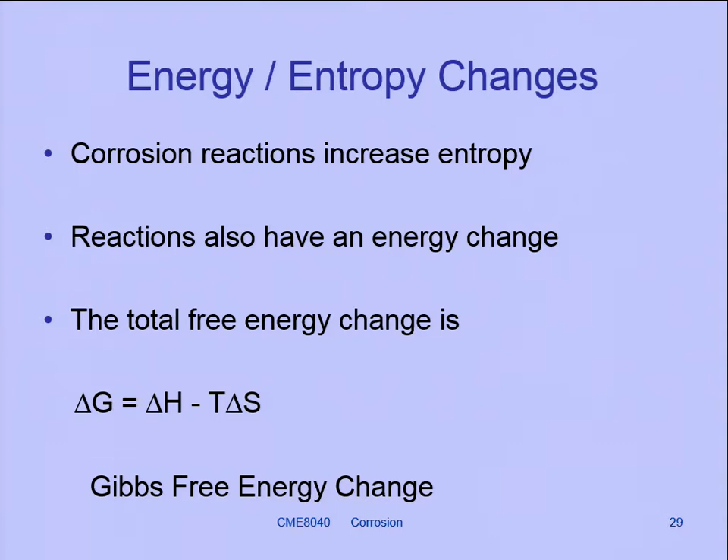I should mention we finished last time saying that all these corrosion processes are reactions, chemical reactions. They have a thermodynamic energy change, and that is related to the electrode potentials that we measure in the field. So the potentials you measure relate to the reactions going on at the anode and cathode. And I think that was our last slide. Yeah, excellent, good, I have to do that because sometimes I get confused. Right, so that's where we were.

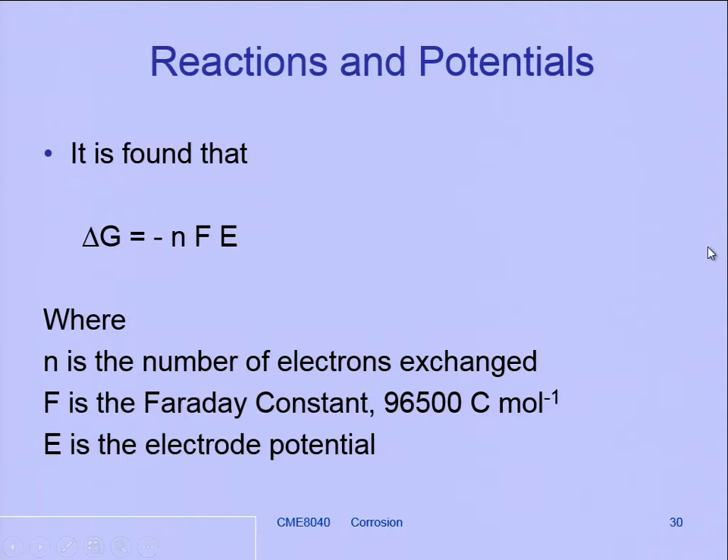What I want to do today is talk a little bit more about electrode potentials. Let's just see whether these are... okay, these are slightly in a different order. So, in order to measure potentials, we need a standard, and the standard that is used internationally is the hydrogen electrode.

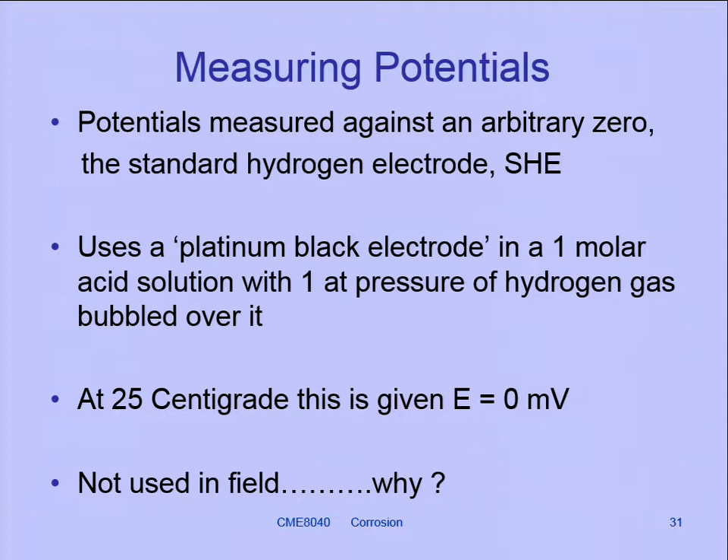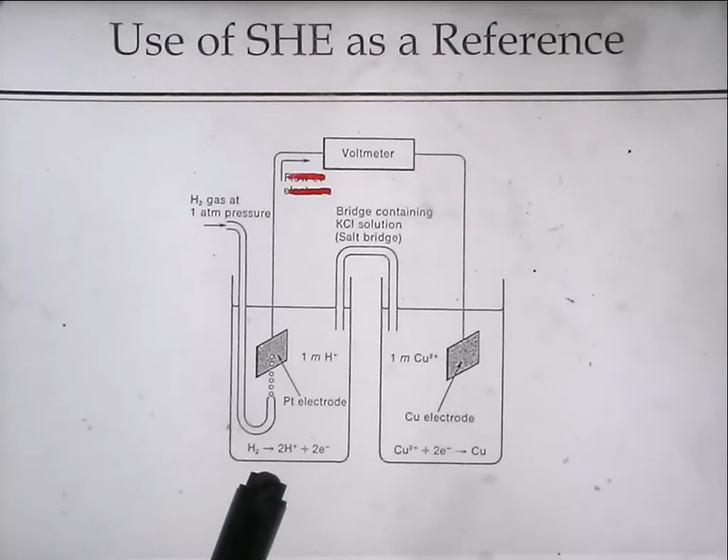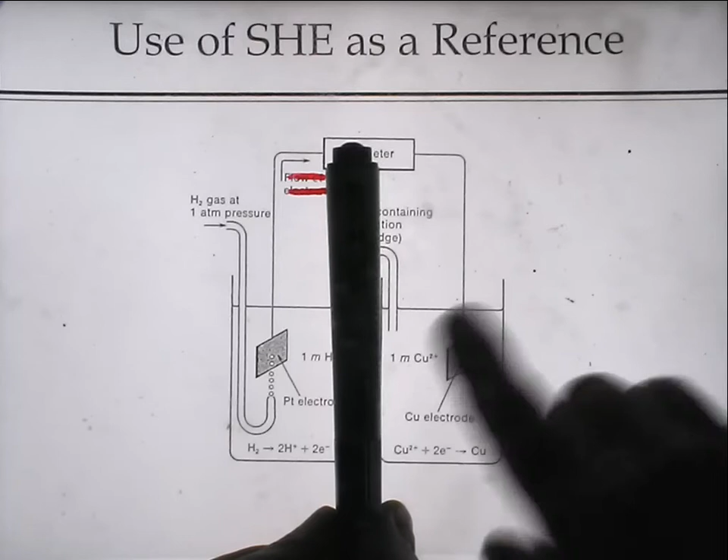What you've got on your handout is a sketch like this, illustrating the hydrogen electrode. The standard electrode is what we call a half cell. So to your left is the standard hydrogen electrode as half of the cell. The other half is the copper electrode, and the combination of the two together makes the whole cell. So quite often you'll see in the text them talking about the half cell reaction.

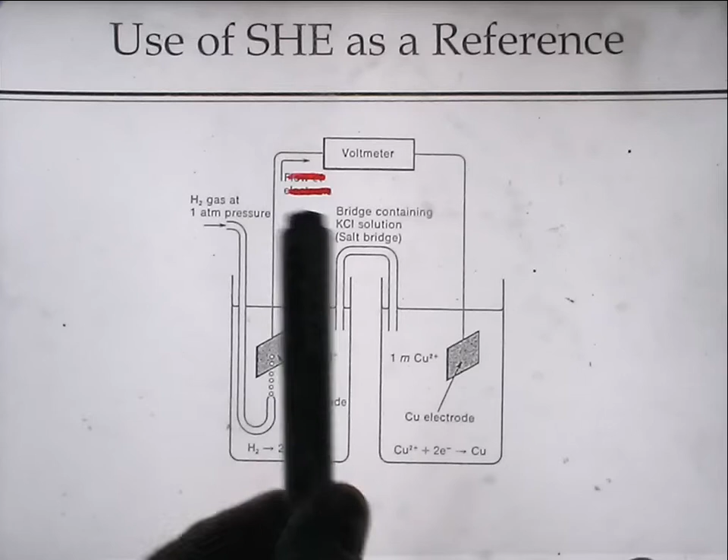Like all textbook drawings, there's an error in here: they are showing, or suggesting, a flow of electrons round the circuit. The whole point of the voltmeter is that it has a high impedance, and there shouldn't be any significant electron flow. There will be a few nanoamps of current flowing, but that voltmeter should have an impedance of something like 10 to the 6 ohms anyway, maybe more, and there won't be much current flowing.

That's how you're supposed to measure potentials without a current flowing. In fact, if you draw a current from a reference electrode, any reference electrode, that's really bad news. You can damage the electrode, and it stops having the constant value that you measure everything else against.

Question: what is the practical usage for this? You take your standard electrode, not this one, this is the lab one, and a voltmeter, and you can go and measure the potential of your pipe in the field. So if it shows 0, it's okay.

How can we detect the potential? Measure it on the digital voltmeter. So what should it show? Well, for example, if you were getting good cathodic protection, you'd want about minus 900 millivolts against a copper sulfate electrode. But you're leaping ahead into the application. The application is to measure the potential on your unknown electrode. Is it being cathodically protected? Is it corroding? What is the potential of this piece of steel in groundwater, or in this case in the lab with the copper plate indicator?

We measure it against a standard using a high impedance voltmeter. So, as I say, this is a half cell and that's a half cell, and the combination is the whole cell. Let's check that. Yeah, that's all right.

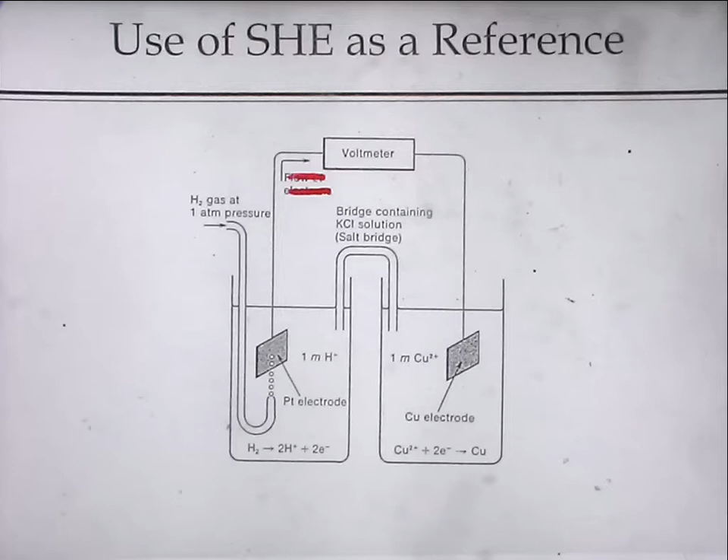What you're measuring, we've been calling it voltage. The laboratory name for it is electromotive force, EMF. And what you find in the literature are tables of EMF values. What you've got in your handout is a small sample of one of those EMF tables.

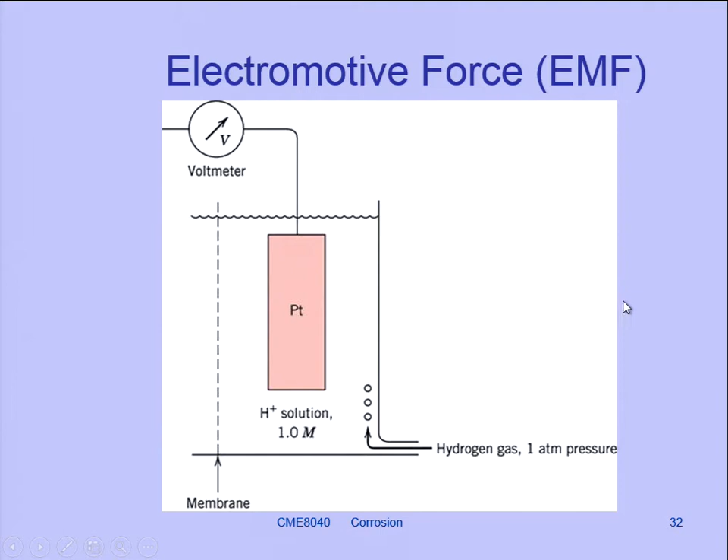Okay, see what the next one is. Oops, might have done that. Don't do that. Yes, okay.

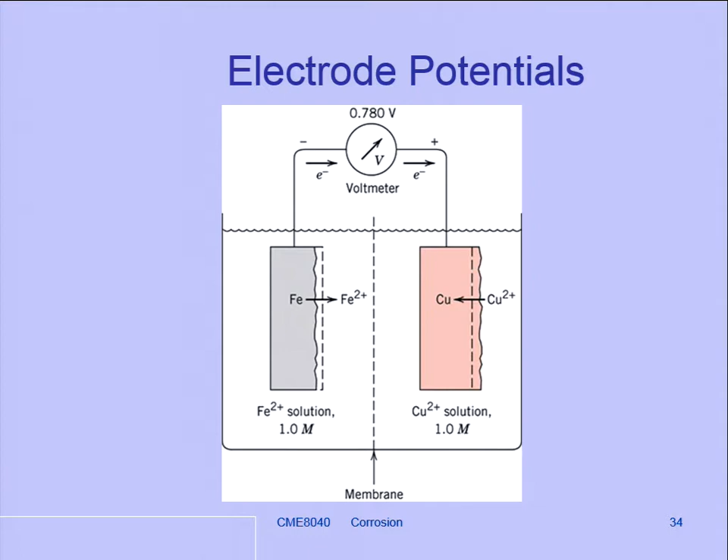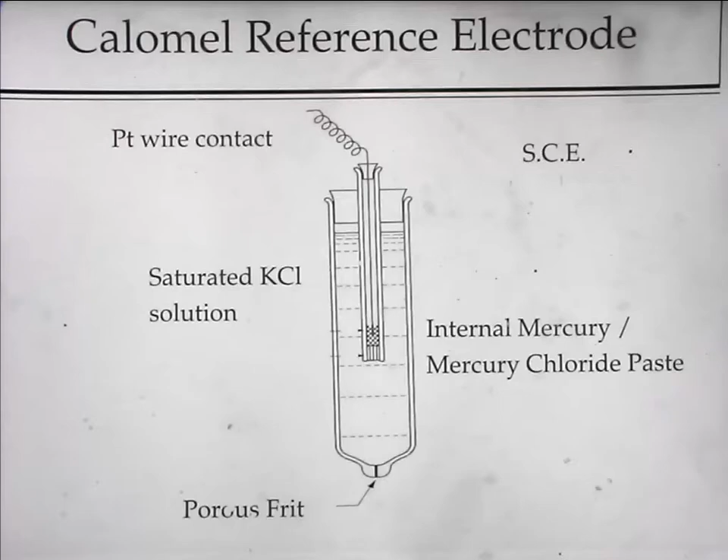This is just a cross-section of one of the more commonly used electrodes. It's still not the most common, and I'll give you a section of another one in a minute. But this is what they call the calomel electrode. It's actually a mercury chloride electrode, but the electrodes all have some basic features in common. They're quite often a plastic tube now, and at the bottom is a porous frit, a link between the solution within the chamber and the environment, the groundwater or whatever your electrolyte is.

And this electrode has a known voltage against the international standard, so I can tell you it's 241 millivolts against the standard hydrogen electrode at room temperature. There are temperature correction tables, but you don't really need to know about that at this stage. The point is, I could measure a voltage in an environment using this sort of electrode and then correct it to SHE.

I can pass that round. I've taken the solution out of it just in case anybody dropped it. The tube now in commercial ones is plastic, but the idea of having a body with a porous frit on the end, with a single lead coming out to go to your digital voltmeter, is the standard format for these things.

Just check. That's all right.

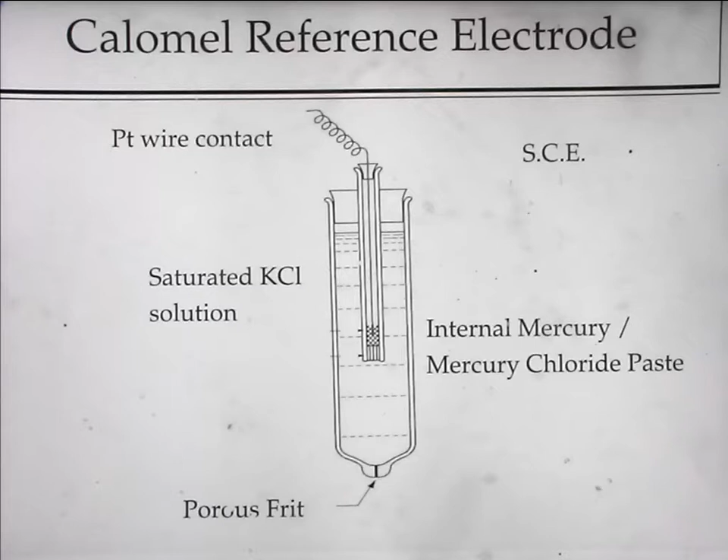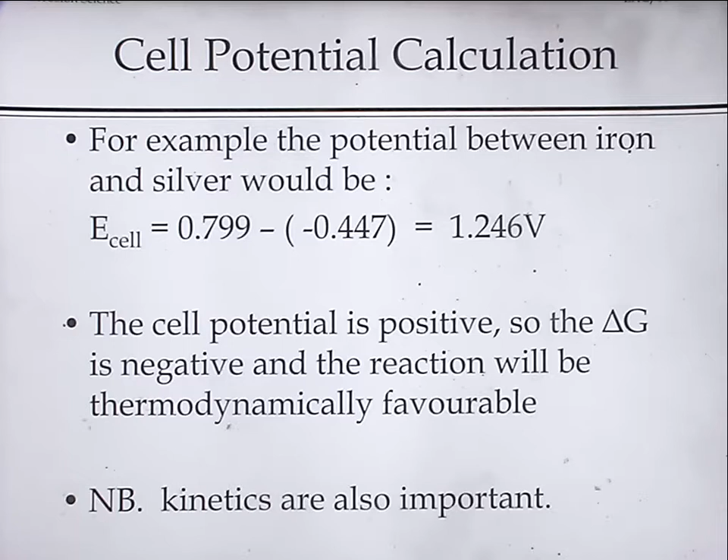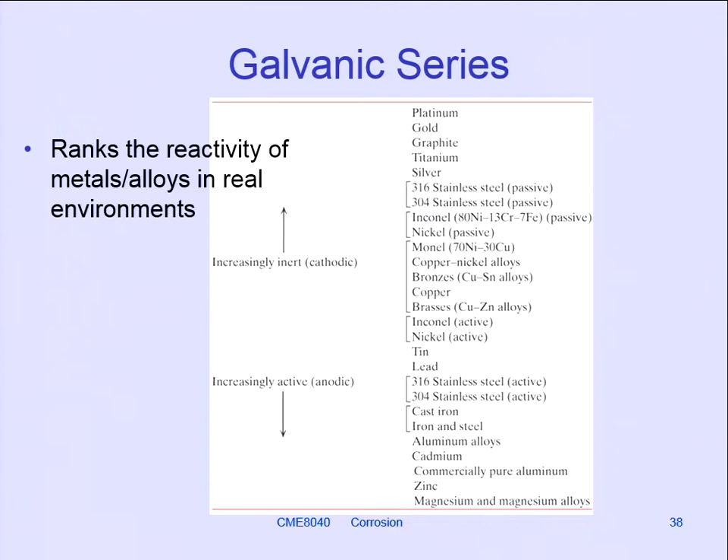Zero value. And then the sort of things that you can do with that - this is a section showing a plot of potential round a pipe. So this pipe is coming horizontally out through the board, and this is the field in the earth around the pipe. That's measured by having one contact on the pipe, one contact on the reference electrode, and using a voltmeter to measure the potential at various fixed distances away from the pipe, and then plotting the graph.

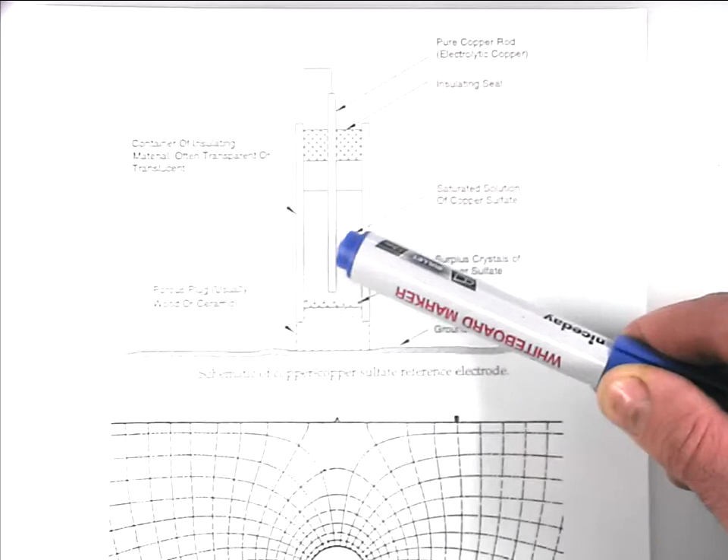So you can get potential field data, and that gets interesting once you start getting pipe lines intersecting each other. So you want to know what the potential gradient is around your pipe, and you want to know whether your pipe field is affecting somebody else's pipe. That's also very common in places like the UK, where we've got pipes intersecting all over the place.

So we can measure the potentials and start using the data. What we've got on the other side of the handout is this little plot, which is just to illustrate the changes in values that you get using different reference electrodes. So this is the copper sulfate electrode. Then we've got the standard hydrogen electrode. And lastly, we've got another standard that's used sometimes, and that's the zinc in seawater electrode.

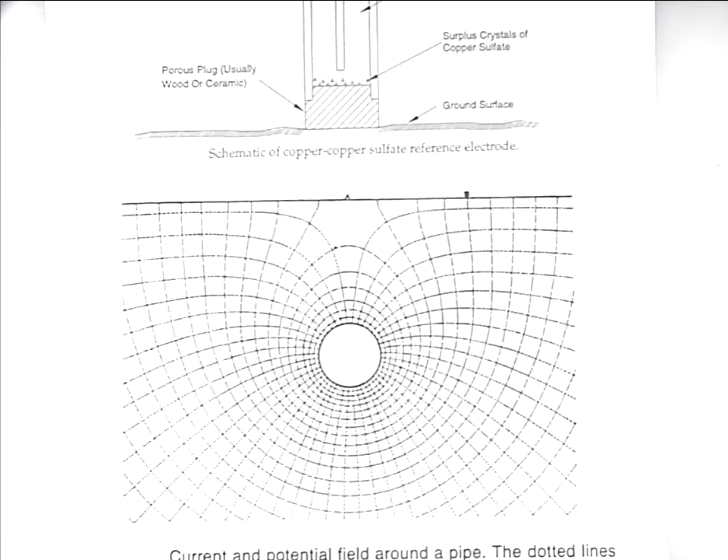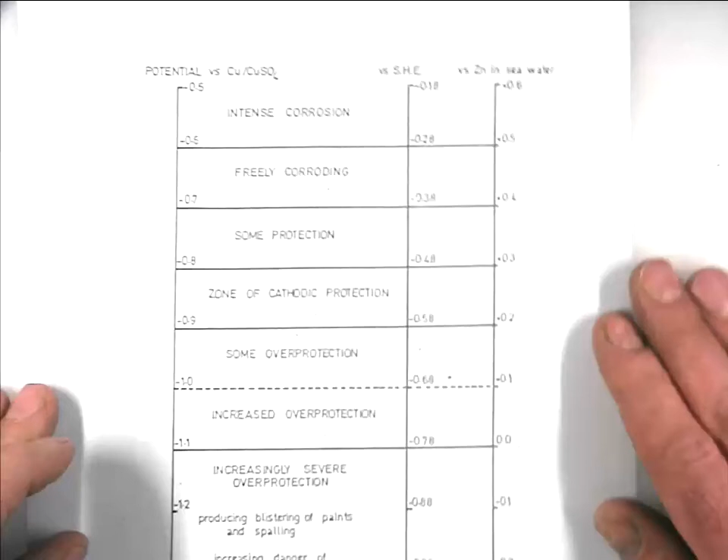The point is, when we get into our zone of cathodic protection, where we're happy that the steel is not going to corrode, that's 0.9 volts against the copper sulfate. It's actually only about 0.6 against the standard hydrogen, and it's only plus 0.2 against the zinc in seawater. So you've got to make sure that you quote the right reference electrode so you know where your values are coming from. Okay.

Is this list always true, or will different books have different zones for the cathodic protection?

This is for pipeline steel in mildly alkaline environments, so it'd be true in seawater, carbonate bicarbonate solutions, groundwaters. They're giving you a zone of about 100 millivolts to allow for that. It's obviously not true for stainless steel or an aluminium alloy, so there are different charts for different materials and different extremes of environment. But this is common data, so if you were asked about a piece of pipeline steel, you'd plump for one of these values and it would be fine.

Unless it somehow got into some weird environment other than groundwater, then if the environment was more aggressive you'd have to put more cathodic protection on. If it was less aggressive, you could save money by turning the cathodic protection down a bit. So it's quite useful data in that sense.

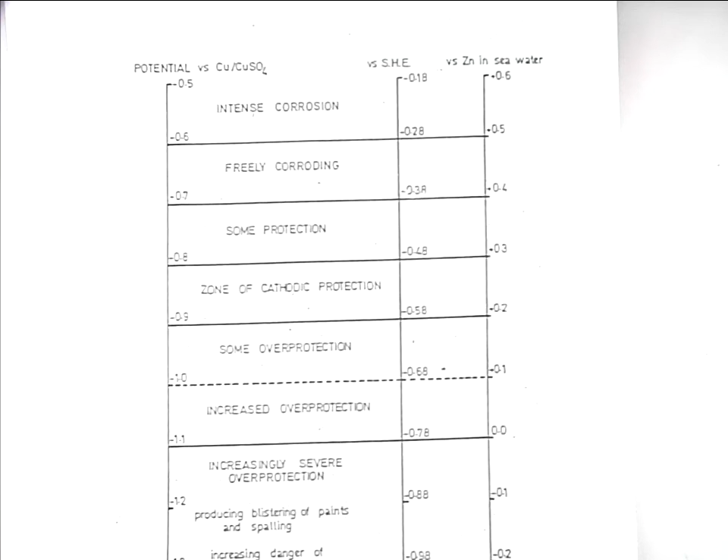That's a pH electrode. It would be used in conjunction with one of those reference electrodes to probe an area for pH, and the active part is this special glass - filament's not quite the right word - but a special glass end to this sleeved probe. That one still has fluid in it, so don't snap it, but they're quite hardy, robust and portable components that allow you to look at pH.

And that's what I want to talk to you about next, a little bit about pH.

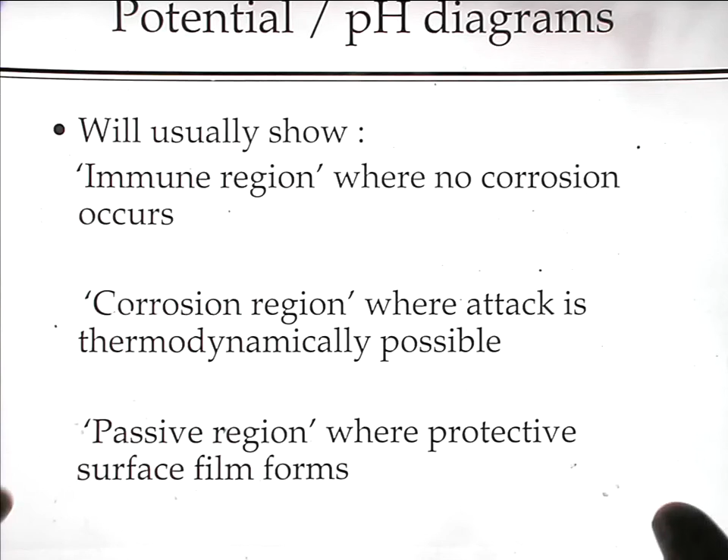So you've got potential against pH on your handout, and what this diagram's showing is as you go to lower potentials, then the iron is the stable form. So this is the immune region where no corrosion is occurring, immunity down here.

At higher potentials, you go more anodic, then you begin to get corrosion, and these shaded regions here, and also at high alkaline pH over here, are the corrosion regions for the steel. And then in this intermediate region here, you've actually grown a film of Fe3O4, which is magnetite, black oxide, and that actually is passivating. So we've got immune, corrosion over here at this end as well, the shaded areas of corrosion, and passivity in this middle region here.

That's common for quite a lot of the diagrams, different shapes for different metals, but you'll find these three regions somewhere on the plot, and in this case actually two corrosion regions, one at low pH and one at high pH.

Okay, we'll talk a little bit more about these next time.

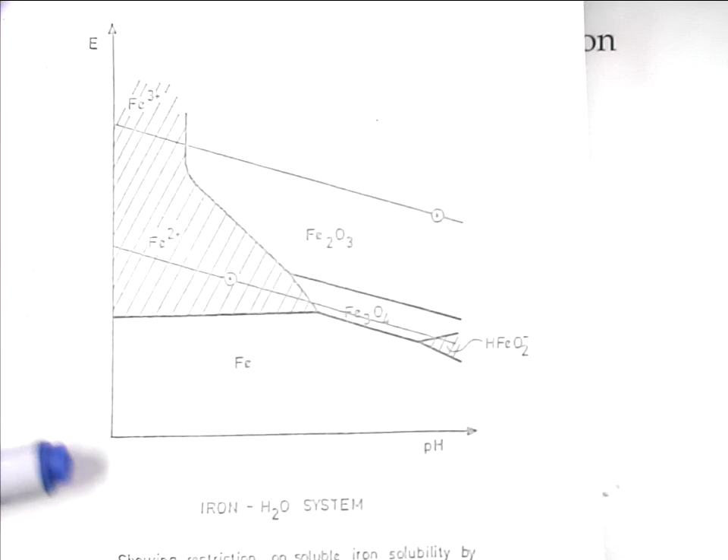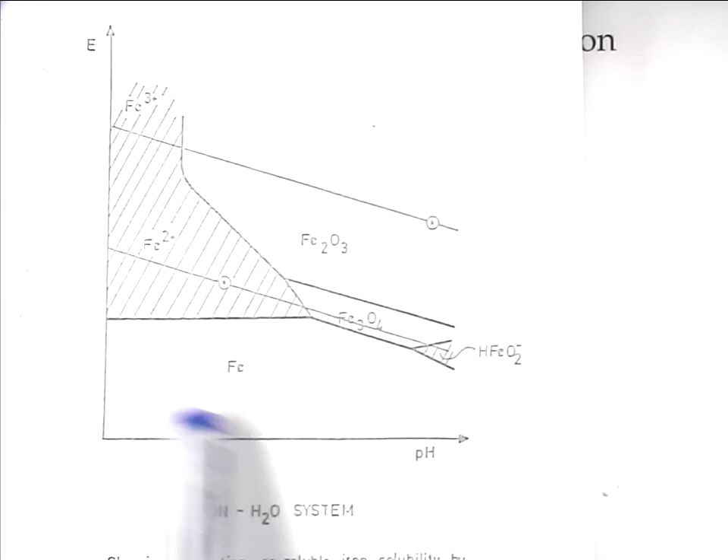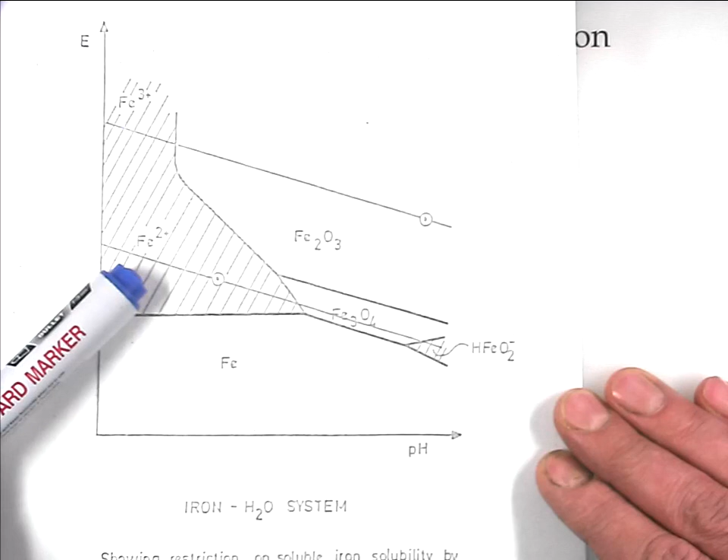The passivity - where this Fe3O4 is, that's a passive layer. So this just starts to corrode, and then it blocks off any further corrosion. Fe2O3 is porous - you can get that at higher potentials, but it's a porous film rather than a passive film. So that's brown rust.

It just carries on corroding.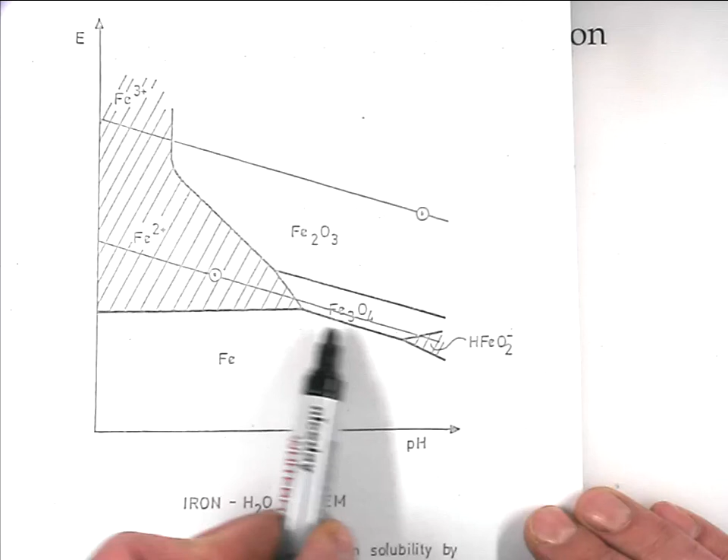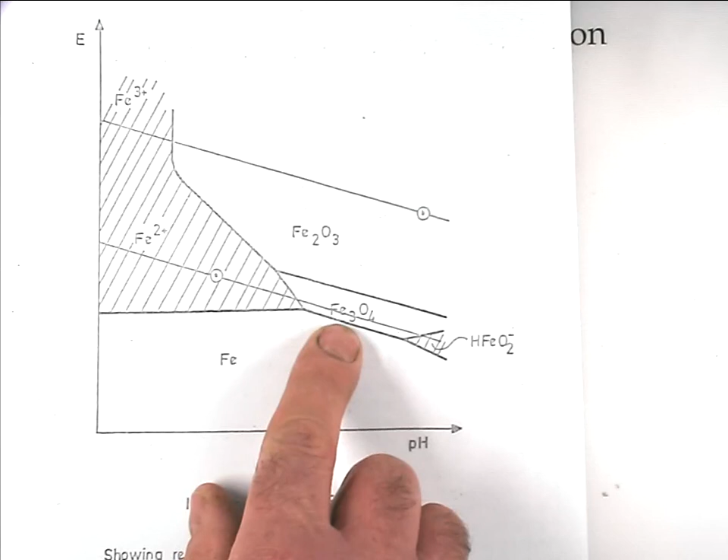So this is passivated, that's fine. Here you get some - you start to get some corrosion because the Fe2O3 is porous, so it won't actually stop. In a sense, as you move more anodically, you're going to get more corrosion generally. So this isn't, I know it's not shaded in, but this isn't passive.

It is tending to corrode as you go. This is showing you what happens if you take a sample and hold it at this potential at this pH. It doesn't show how it will change if you move it.

Fe3O4 is stable, so it will just stay, maybe over a long period of time, but it doesn't tell you anything about the speed of the processes. This is thermodynamic data. It just says if you go there, then a piece of steel will corrode. If you go here, it won't corrode. If you go here, it will passivate.

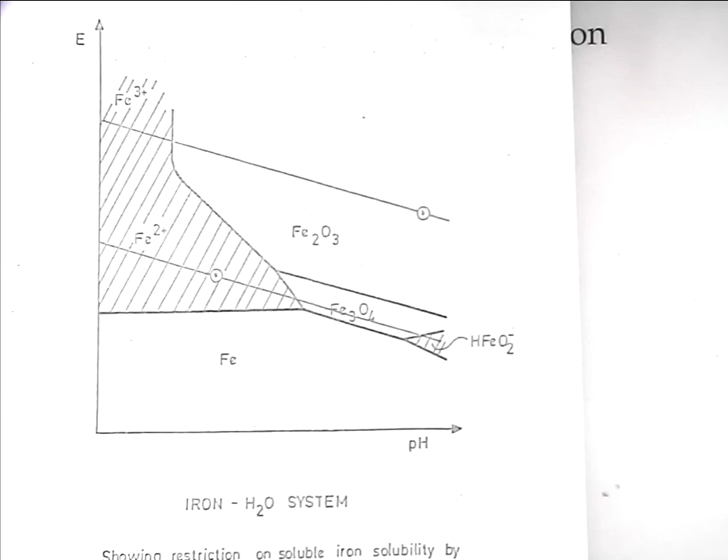There's quite a lot of interest in cathodic protection. What I look at are things like when the protection goes wrong. So when you get overprotection, you start getting hydrogen embrittlement. So that's one of the things that I look at.

Thanks. So we could...